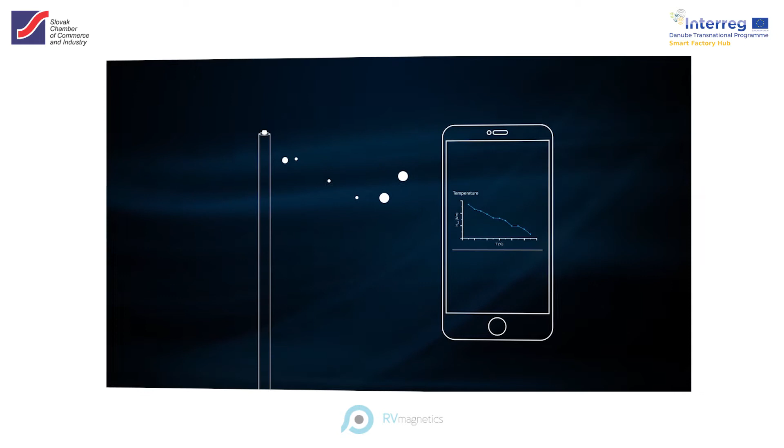Did you know that the future of wireless measuring might already be in your hands? RVmagnetics introduces miniaturized glass-coated smart sensor, thin and elastic like a hair, that sends accurate real-time data regarding a wide range of physical quantities directly to your phone. Measure temperature, pressure, pull, stress, torsion, or position of your materials with a tool thinner than a grain of sand. Now it's not only affordable, but also quick and easy to manufacture in order to adjust to your specific requirements.

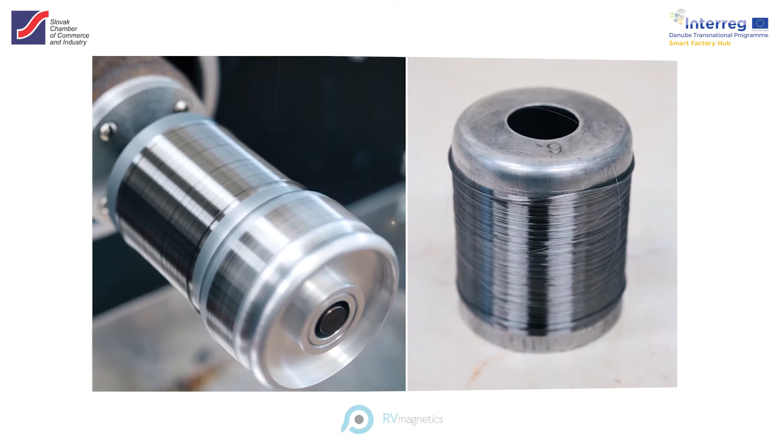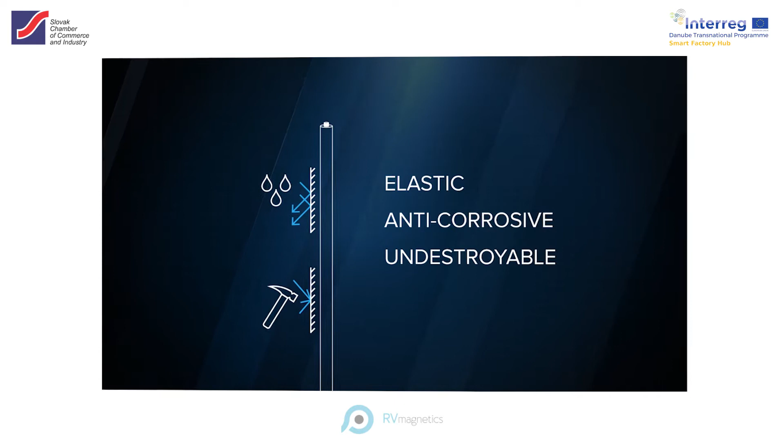Passive measuring is based on microwire technology and magnetic fields with no need for power sources. The elastic, anti-corrosive, and undestroyable sensors can be placed in almost any material without affecting its properties or environment. All you thought sensors can do has been redefined. Want to give it a try? RVmagnetics, when size matters.

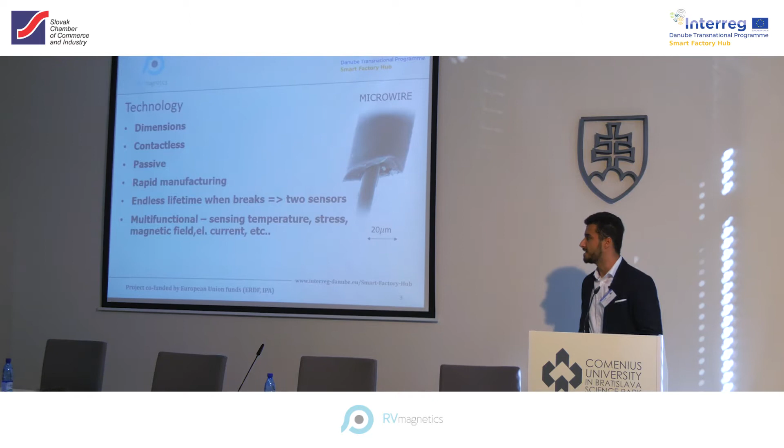Just a little bit of video of what we did, but the true value lies in the technology, and I actually brought it with me. Inside this small cube, there are hundreds of sensors, which, from the distance that you are, you actually cannot see, but it's there. So for those who would like to see the dimensions of this sensor, please come to me afterwards and I will show you. As you can see, the diameter is 20 microns, and the length can go from 2 centimeters up to whatever size we need. So the dimensions are one of the greatest added values of this sensor.

Another feature that is very important in many fields, and Industry 4.0 as well, is that it's contactless. Thanks to their magnetism, we can actually measure from afar, from a distance up to 10 centimeters. So we don't require any electrical contacts, and we can measure it magnetically. Also, they are passive, as was mentioned in the video. So they don't require any electrical contacts and any electrical battery. Also, the rapid manufacturing is very important. Why? Because we are able to make 100,000 sensors in 10 minutes from 1 gram of metal. That means we are ready for mass manufacturing.

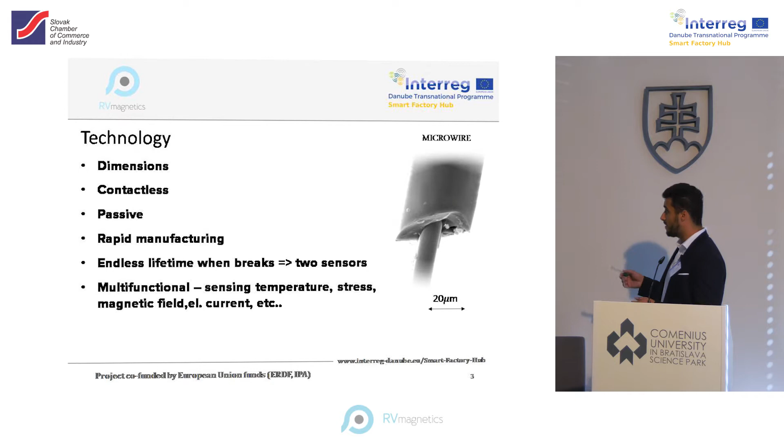They are magnetic. So imagine a magnet. It has a south and a north. Our wire or microwire is the same. It is magnetic. It has a south and a north, 1 and a 0. So what happens if it breaks? If you're talking about electrical sensors, if it breaks, it doesn't give you accurate measurements. But our sensors behave exactly like a magnet. If you break a magnet, you get 2 magnets. If you break our sensor, you will get 2 sensors. But you will still get accurate measuring, which is very important when we're talking about different applications in many fields.

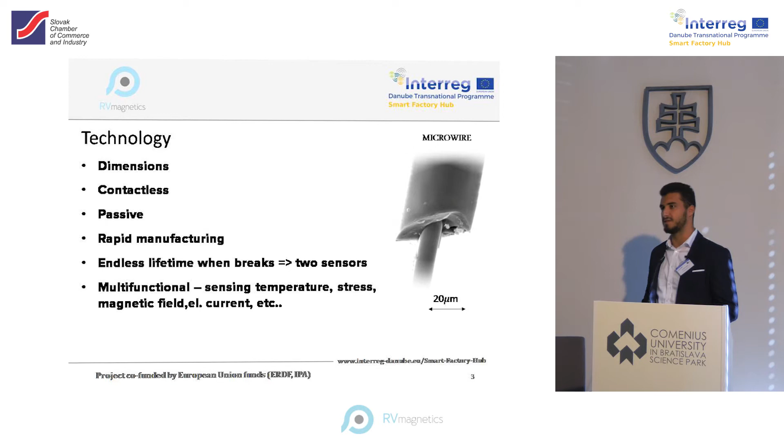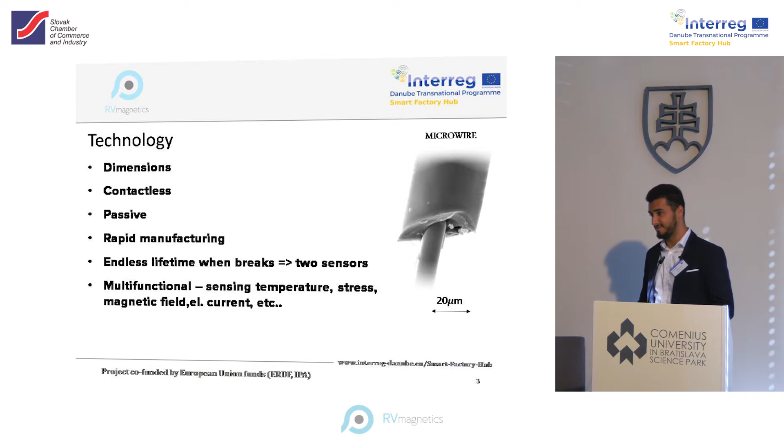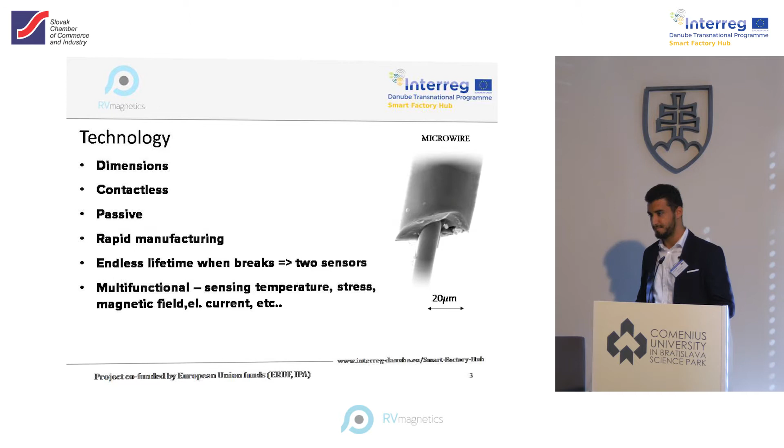And the most important thing is the multifunctionality. We're not only able to measure the temperature, but we're also able to measure mechanical stress, so bending, torsion, pulling, straining, anything related to mechanical stress, and also the magnetic field. And from those we are able to calculate the electrical current, the humidity, and also other physical quantities.

So let's talk about Industry 4.0, that's why we're here. What are the possible collaborations, what are the possible applications that our microwires can be used for? Their dimension is really small, so they can be embedded inside the material during the manufacturing process or glued onto any surface of material when it's ready. For example, they can be used for predictive maintenance of many different parts in robotics as well. So imagine embedding these small sensors, hundreds of them, a mesh of them, into a robotic hand. You're able to get the strain, the stress measurements, and they're very accurate. Even the temperature. We can get to an accuracy of 0.01 degrees centigrade.

As well, we've used them in smart robotics and structural health monitoring of different materials. What does it mean? If you're talking about structural health monitoring, even composite materials or different materials, they can be embedded in almost any material in the world which is not, of course, ferromagnetic, because they are magnetic. And with this, you can actually get the sensing and the readings of temperature, stress, pulling, torsion. If you're talking about automation, when the robot is going to break or not, when it's overstressed, or any different measurements.

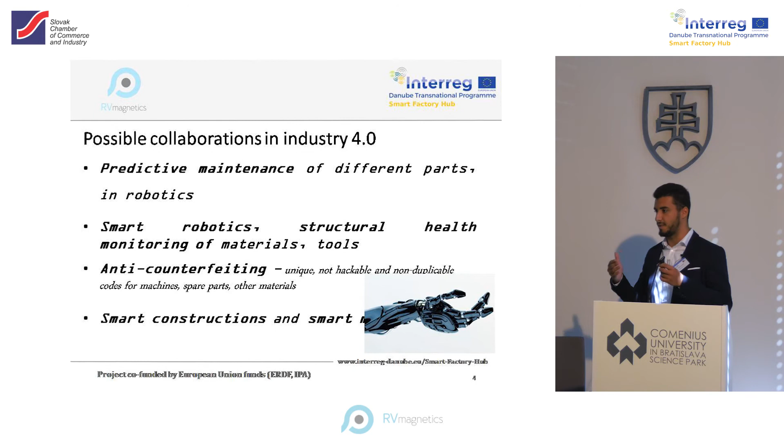And the fourth one, and not the last one, is smart construction and smart materials. If we embed these into any ordinary material, let's say plasterboard, we will get a smart plasterboard. Imagine a plasterboard that has the same weight, that looks the same, and the manufacturing costs are really inexpensive. You will get a smart material. You can create smart houses.

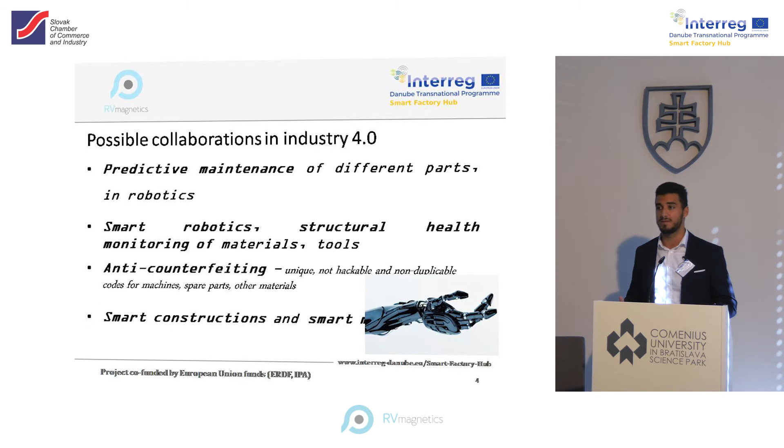It will look the same, it will weigh the same, but it will actually tell you what's happening behind the wall. If there is a temperature rise, if there is a fire incoming, if there are some short circuits, if there are some cracks in the buildings. With these materials, you can actually make the world smart.

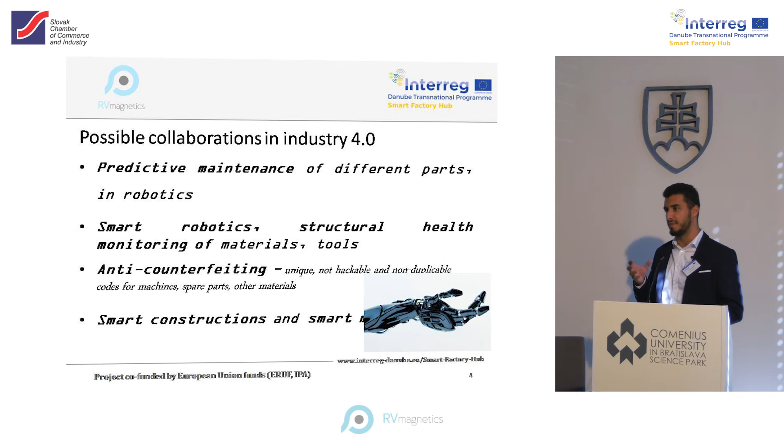Talking about other collaborations, we also use them in the medical sector. I don't want to go into detail with these, but just want to give the perspective of this sensor and what it can actually do. We are measuring real-time and accurate localization of tumors inside the human body. Also the airflow and gas monitoring in pipelines, and structural health monitoring of these pipelines inside the ground.

Measuring temperature and pressure inside a titanium implant. In the cranium titanium implant, we are able to get the signal even from behind the titanium implant. There is a metallic core and it's glass coated. And this glass coating gives us biocompatibility, so it can actually go into the human body.

An interesting topic is increasing the efficiency of the electric motor by measuring the temperature in real time. Why is that important? We are able to get these sensors inside an electric motor. They can go up to 600 degrees without damaging their properties. With these, we can measure the real-time temperature inside the electric motor, so we can increase the efficiency, because we can go to higher limits, since we know exactly the temperature inside the motor.

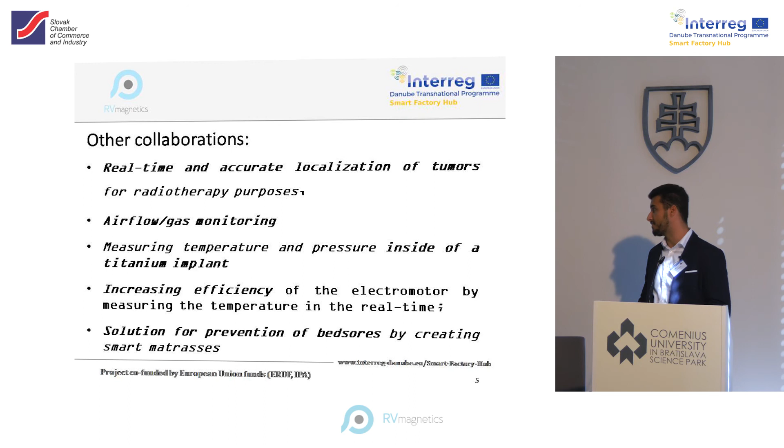And last but not least, the solution for prevention of bed sores by creating smart mattresses for health clinics, without even touching them. So imagine these small sensors in many materials. Imagine what these small sensors can do.

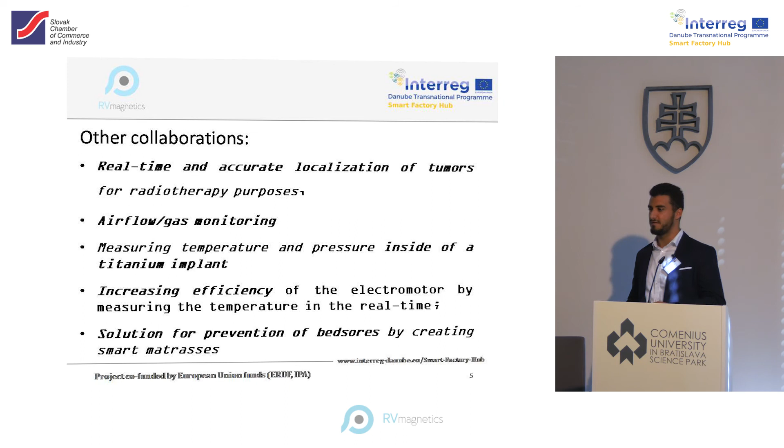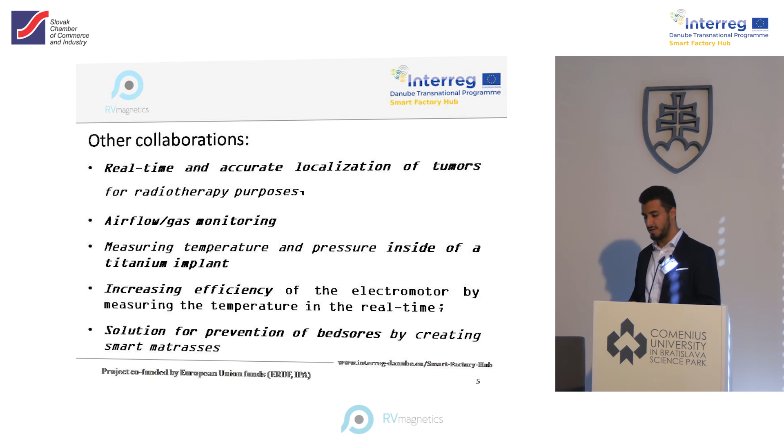Not only in the manufacturing process, not only in creating smart composite materials, but imagine a mesh of these. They're able to sense. Imagine you touch something with your own hands. You can feel the temperature, you can feel the pressure, you can feel what the material is made of. These are almost the same thing. These are the future.

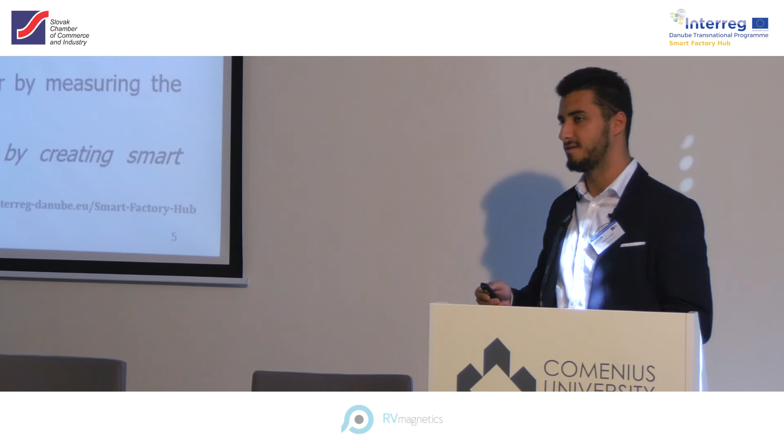So what are we actually looking for? We are looking for application partners who can adopt our sensors. This is a technology, it is not a final product. We are in close collaboration with large companies who see the added value of these microwires and want to make their materials smart.